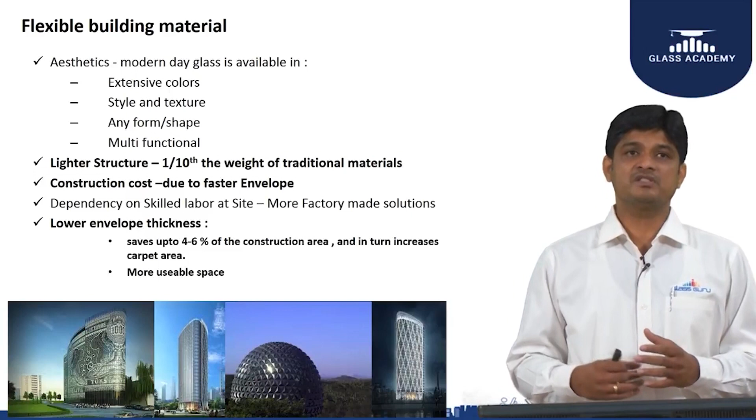envelope material, not only for its function, because it brings a lot of other important benefits in the entire process of construction engineering. So how to understand glass then? Since it has various phases - a functional role, a structural role, a benefit - you have to understand glass by design, by analysis, by need. What is the need of your particular building, or the need of your particular application? What is the benefit you are looking for, whether it is fire, safety, aesthetics, or any other application.

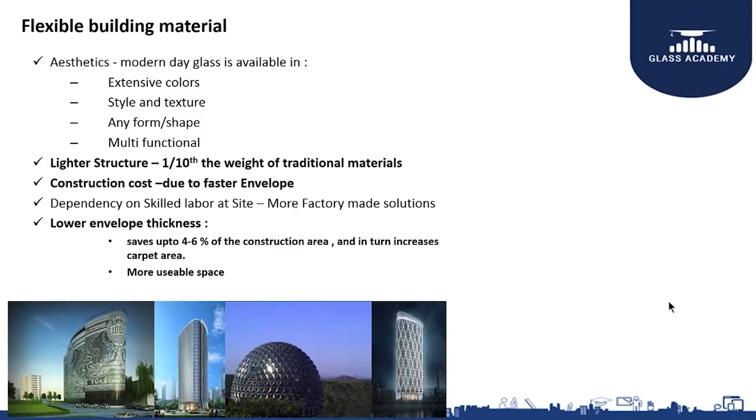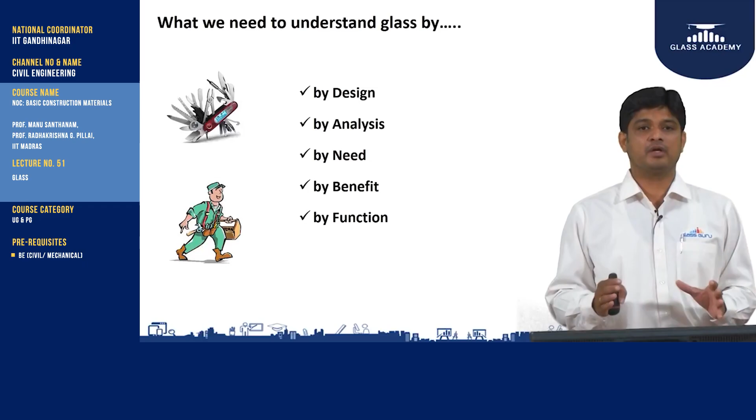By function, what you want the glass to do - whether you want it to be just an envelope material, or you want your glass to express something, or you want to make glass your digital media facade - it all has to be understood. So before getting into the course, we should understand: when you want a glass building, you need to understand it by design, by analysis, by benefit, and by function.

So this course on design and applications will cover all these listed topics. We start with modern architectural requirements, where first you need to understand what the National Building Code of India suggests on the basic design parameters for any building, and specific to envelope, specific to fire, specific to its structural design requirements.

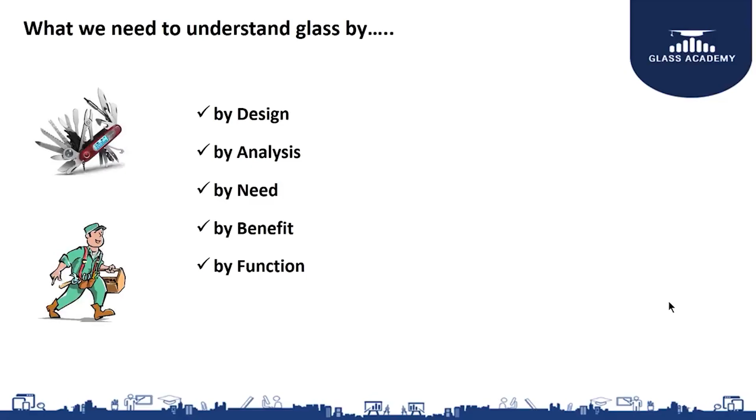That has to be understood in a very clear and deeper fashion. Then the next step is how to make my building sustainable. First we need to understand the building physics, how heat is going to transfer, how light is going to come, whether I am going to take the light I need, or address the glare issue later, and what design aspects I have to integrate.

There are various green building programs in India. So what are the requirements specific to envelope, specific to light, specific to energy? That has to be understood.

Then the moment I go to green building, I need to understand the basic energy conservation building code, or the Indian standard IS 16231, which is the use of glass in buildings. I need to understand how to use it, where to use it, and what kind of glass to use. Again, it is not one solution for all. Based on the different segment or type of usage, the building design, the envelope design, or the glass or facade has to be different.

Once I understand the basic design criteria, I have to understand glass as a material and the manufacturing of glass. This is very important, because once you understand the basic manufacturing, you see the types of glass available - basic glass, tinted glasses, high performance coatings available today. Based on your application, you need to understand what kind of glass to use, because glass has its vital role.

There are innovative applications in glass, whether it is electrochromic glass which can tint, or understand your building, or understand your climatic condition and function on its own. There is digital printing available today, which can create complete aesthetics and communication on your building.

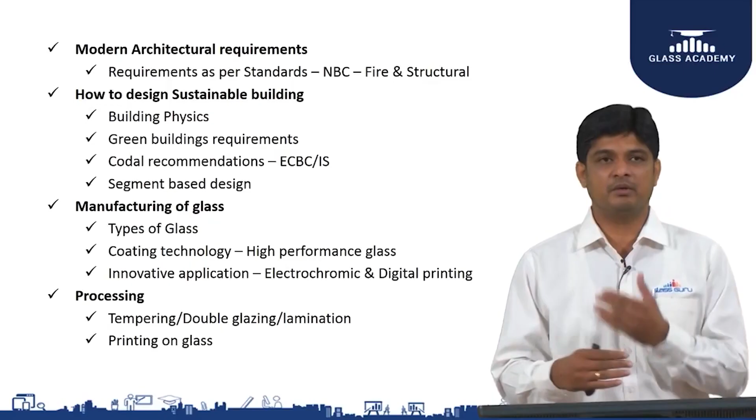Once I know about the basics of manufacturing glass, next I should be aware of the processing - what kind of process I have to adopt to improve the structural property of my glass, whether it is tempering or toughening, whether I am going to use a double glazing unit, or laminate my glass for safety, or do any other value addition like ceramic printing or screen printing, which helps both in aesthetics and functional mode. I need to understand that.

Once I've understood the basic design, the manufacturing, and the processing, I need to really understand how I am going to design glass as an envelope material. What are all the key glass parameters like solar factor, U value, and light transmission? What is ideal for Indian climatic conditions? What does my codal recommendation say?

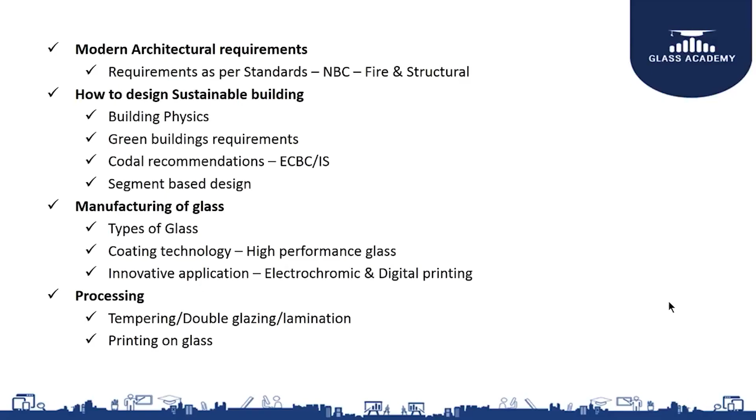So how to design? Overall I need to understand how to design the facade - here facade means the glass and the system. Once I do a glass and a system, it has to behave both as an envelope and as a structural element. Then I'm supposed to understand what is relevant on facade testing, what are the requirements and standards, how to test a facade, and what criteria the design has to address.

Then how to design my building or facade against daylighting requirements and energy efficiency - I have to model it. What are the design tools and simulation software used today to understand the impact of various envelope materials, precisely the glass? Since there are lots of varieties of glass, I need to understand what impact it is going to have on my light and heat, which is the energy.

Then I have to understand the various kinds of high performance glass available, starting from the basic generation which is the online coated glass, till the offline coated glass, where you have multiple generations - silver based, single silver, double silver, and triple silver based glasses. Once I understand the glasses, I have simulation software to understand the impact on the overall envelope.

Then, is the glass going to function against acoustics? Am I going to design it against fire requirements, fire safety norms, or use glass for interior applications? Based on that, there are local codes available which help you understand, for safety and security applications, what kind of processed glass has to be used for what kind of application.